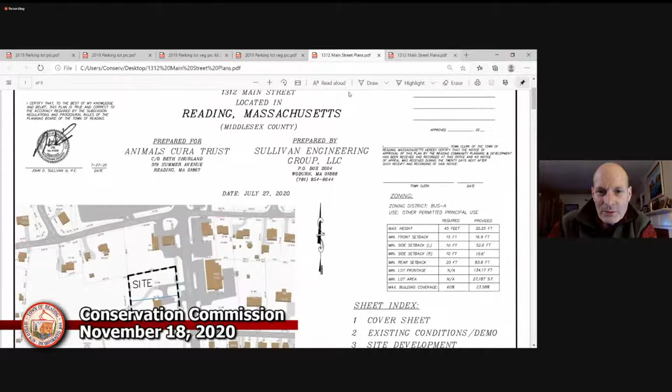So let me just start sharing the screen, and hopefully this will work. So it was - does everyone see that? First off, I'm always unsure if... yep, sure. So it was in this area here, beyond what is the existing gravel parking lot, that we noticed a low depression. So I'm going to switch to some of these other ones. Here's the parking lot. Let's go to this one here. Get to the right one. Yeah. Okay.

All right, so you see the aerial with the 3 areas highlighted? Mike, do you see that? Yes. Okay, so the areas - here's the veterinary hospital right here.

Here is the parking lot from an aerial photo in 2019 that I used. And down here at the bottom, next to the existing house, which is off the property, is a flagged wetland. This becomes important later.

We checked out this area above, right in the center, and a smaller area here. What we saw was in these low areas, dominated by buckthorn with some high bush blueberry, royal fern, and cinnamon fern. The fern was visible along with the buckthorn as it extended towards the parking area and driveway. The ground rises up as it gets closer to the fence and the parking.

We did 3 soil augers in this area here. We did 4 in this area here. And we did 2 over here in the flagged wetland. That's not on our plan and that's not part of our project.

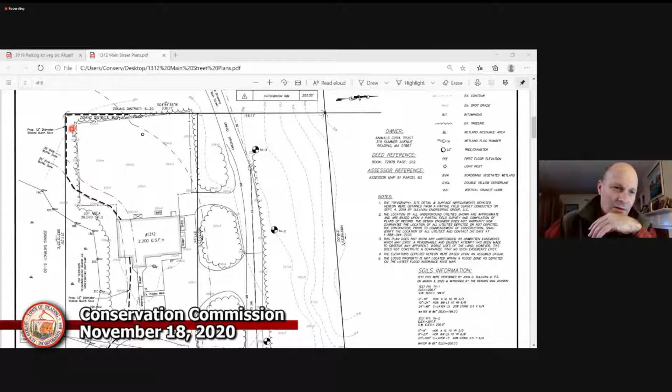What I want to highlight here is this bordering line where the property is, and then the parking area in this area here, and here's the entrance. Assuming this is taken in 2020, I was looking at the aerial photos, and I noticed that this is a 2019 photo, and in this area here, which is approximately 7,000 square feet, there's trees and vegetation. And we weren't told about a parking lot expansion in 2019.

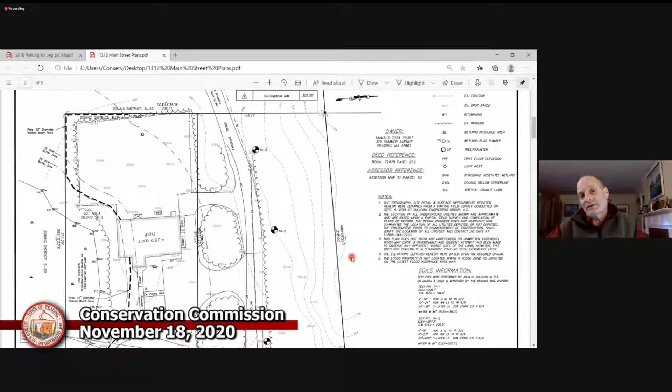And I think that should have come in front of the Conservation Commission. So I'm wondering if there's any information about this area here, which has trees and vegetation in it, and has fewer cars in it than what is out on the site now. That's my question. That's what I found, but I'd like to know if there's any explanation for that.

I think we lost Jack for a second here—he's letting back in. Jack, I think we lost you there, but did you hear Chuck's question? I did get lost and I missed some of that, but okay.

So the question was in regards to the parking area. Looking between the aerials, it looks like the parking area has expanded recently, and I guess there was a question of whether any area was taken to increase the parking area size recently—what's behind the existing building? It looks like the parking area has increased, and how was that, from aerial photographs or something? Yeah, it's comparing the 2019 aerial photographs versus the size of the parking area laid out in the plans.

I wouldn't have that information. Since I did my survey work there two years ago, that's how it existed. Going back two years—if the owners are on, they could try to answer that question. But as far as I've been involved with the project, that's how it's been. There was a fence there, and we haven't expanded it. We've just been parking there, and we put some gravel down, but there's been no tree removal or brush removal of any kind. It's just been that way for a few years, I think.

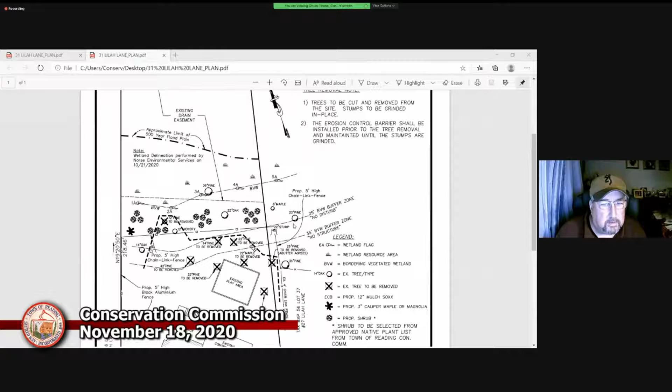The one we're talking about inside the zone there, is that the 12-inch pine to be removed, right? Yeah, kind of right around that notch. Our only thinking there was that where we were putting the fence was pretty close to that, but we can work around that. Yeah, we can leave that one.

That's fine. The only other thing I want to know is what's the heavy dotted line that wends its way through that area? I think that's where we're going to have to put those mulch socks. Jack, you can probably speak to that better since you did this. Yep, that's just the mulch sock to be put in. When the trees go down and they grind the stumps, they're not going to excavate any of the stumps, but we'll put in that mulch sock as protection during that process.

I didn't see anything noted on that, so I didn't see it in the legend either, so I didn't know what that was. But those are the only things I had. It's labeled ECB on the line, and you can see it over in the legend. There are two areas where it says ECB on that line. It's a little hard to see, but in the legend it says ECB equals proposed 12-inch mulch sock. Got it.

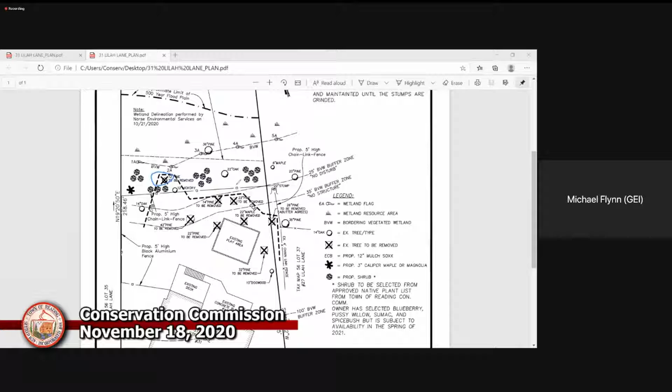You're muted, Chuck. I think I said at the beginning of this, it still doesn't mean there's never hiccups with this remote stuff. Can you call in? Chuck, you're still muted. Okay.

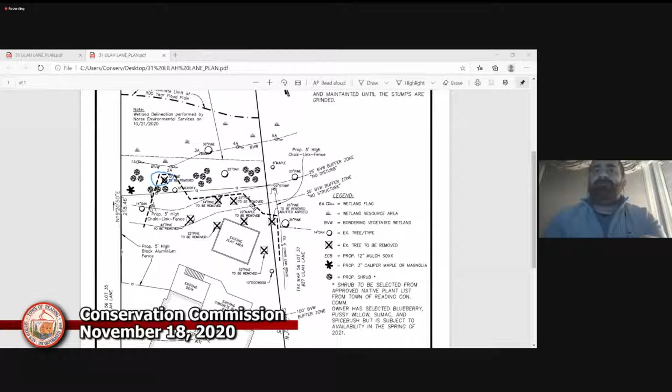Hi, I just had a question. The proposed shrubs to be selected, I think that's what you indicated was the mitigation. Is that correct? Yes. Why are these placed where they're placed? What was the reasoning behind that?

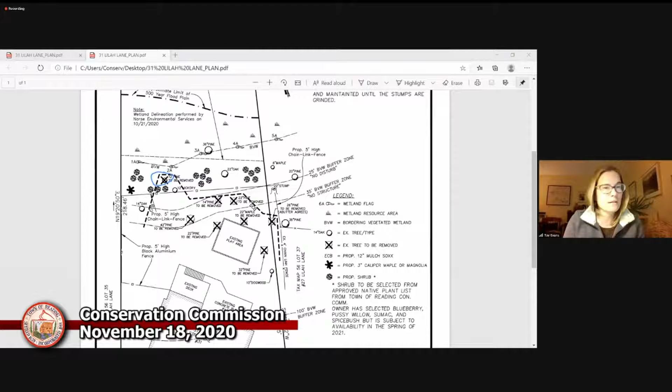So I was under the impression that it was supposed to be somewhat natural in our replacement, but we're certainly willing to accept some guidance on where those go. We're not wedded to those locations. We would like to mitigate the removal of the trees to preserve the wetland and preserve the area in as much as the natural state that we can. So we're open to suggestions there.

I think we might need some advice and guidance from a landscaper or somebody to help us with that once we get there. And so if we wanted to put some of that inside the fenced area, we could certainly do that. We're trying to, our goal was to keep it natural and place it.

I think just to add on to that, the idea was to try to put the plantings within the 25-foot buffer zone so over time these would become natural enhancement plantings in that area, because it's somewhat open now. So by adding all the plantings within the 25, you're going to get a more natural look and you'll get a naturally vegetated 25-foot buffer that doesn't exist right now.

Yeah, I haven't been to the site, but I'm curious just because the impact was further out, and I didn't know if where you placed it needed any enhancement per se.

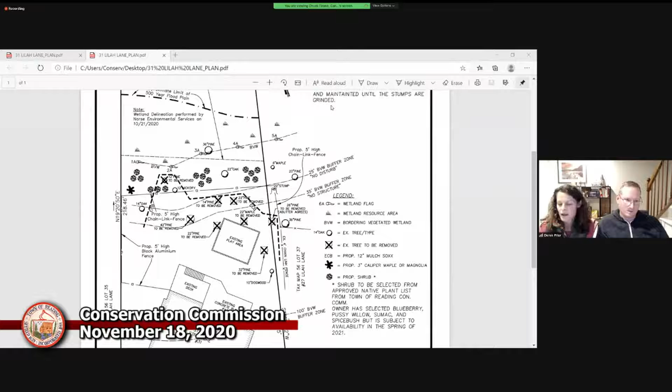Can we ask about the fence as well, if we're going to have to come back, I want to make sure we get that addressed. Our goal was trying to get this installed before the ground is frozen, but we're just trying to do everything the right way. It's just not the process I expected. So can we move forward on any of it?

So the fence you're proposing in the back, inside the 25 foot there, is it proposed to come around on the property line towards the front as well? Yep, it's basically right on the property line as you're looking at it on the screen here on the left, and then connecting to the house. I don't think it's pictured here, but it would do the same. Our neighbors have a fence along the property line on the right side as you're looking at it, and we would connect it on that side as well.

Do you know what the fence on the side coming from the deck area and the sides of the house - on the left side, the fence coming from the deck and over to our property line and back would be a 5 foot aluminum black fence with vertical gaps in it. On the right side, there's an existing chain link fence, so we would basically just go over to that, let that run back to right around the tree that's on the property line there, and then use chain link in the back as well.

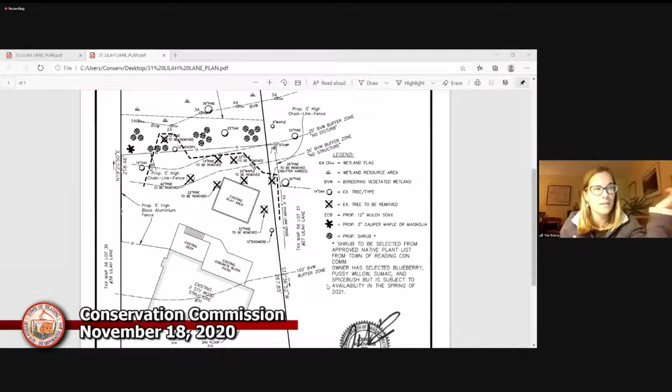I think Main Street is the example we got at 14 Main Street, where what happened was they went through and rated trees on a kind of rating system, saying yeah, this is either a concern because in general these trees are always a concern, or this is not a concern because it's not in a high wind zone, or this is not a concern because of the location - even if it fell, it's likely going to fall away. If you're a homeowner, even if it fell, with this type of proximity any falling may just be a problem.

So I think arborists generally do have the ability to apply some level of assessment on what the safety concerns are here. And I think that's why we want to have that - there have been times where a homeowner has come to us and said, look, this is really close, and the arborist said, well, this particular tree - yeah, all these other ones seem to be at risk, but this particular tree or these two particular trees really aren't at risk, there's no risk of them falling. And I think we want to be consistent with that.

Okay, that makes more sense.

Sure, and I would add that Mike Hannaford, who is our tree warden, has a list. He goes out there and checks for stress cracks and disease and certain things, and he rates it after going through this checklist.

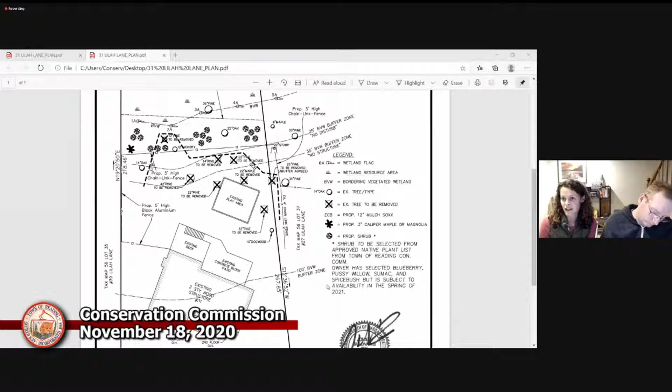I do want to acknowledge that I understood you wanted to see some kind of letter from a tree company or an arborist, and I did try to get that letter. It was hard.

It seems like they're just telling you what they can say. I'm trying to think of this practically, like if I asked somebody to give me an estimate on remodeling my bathroom and they said, I could write something up, but I can just tell you we're going to fix it. What you need to say is, this is not the person or company that's going to give me what I want.

What do you need it to say? What more would you need it to say? If somebody said it was likely to fall, that would be good. So the commission evaluates, we do not guide. I can give you some letters that we thought worked, but your arborist should know what we're talking about and be able to put together a letter. That's their expertise, I just want to be clear.

Hold on, I just want to be clear. If the letter said the tree was likely to fall, that would not be enough? We're not asking, it's not enough. It needs to evaluate if it has symptoms. Okay, well, it's for the arborist to put together.

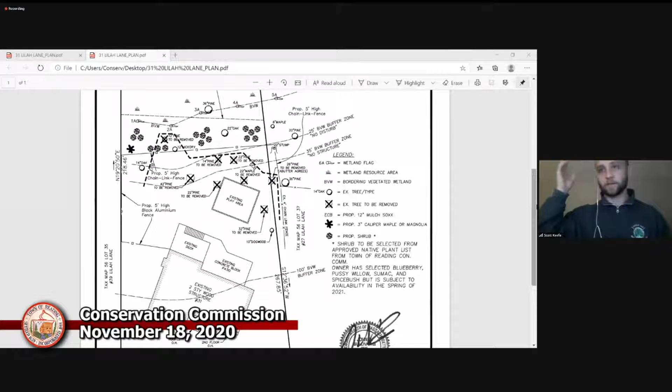Are they planning to put a gate in the fence? I'm just wondering because if there's proposed plantings going beyond it and the fence goes up, is that going to cause issues? That's more... Yeah, we were going to put a small gate back there.

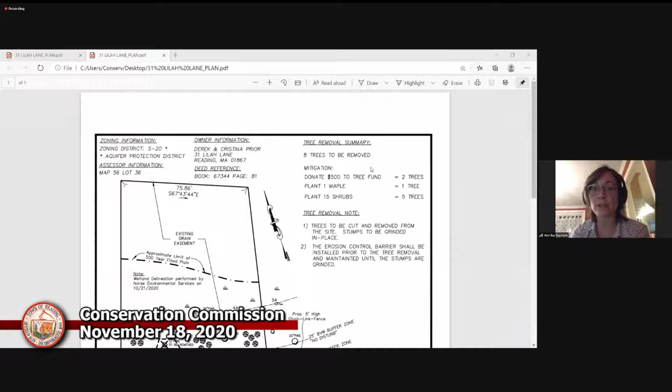Annika, sorry about the background noise, and sorry about coming into this partway through. One of my questions is, has there been any discussion of replanting at this point? Because it seems pretty clearly stated from the applicant that regardless of the health of the trees, they are interested in taking down a good portion of them. So have you guys already discussed replanting?

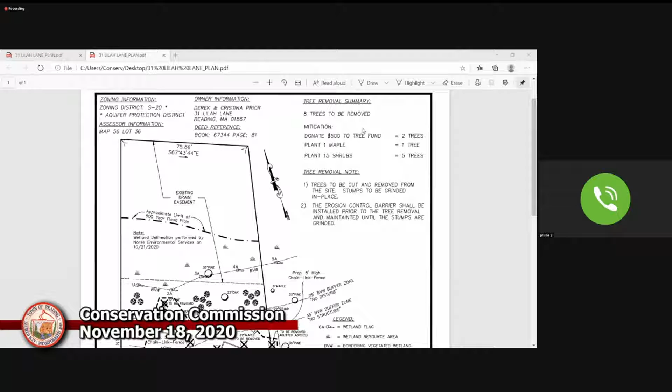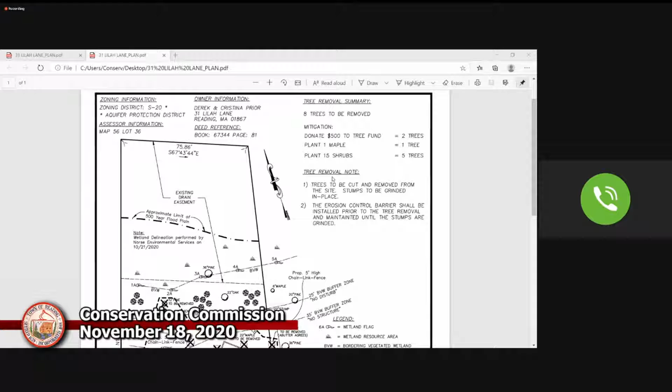Yes, the replant. I've moved the plan down to show what they're going to remove. It says 8 here, I think we've changed that to 7. Is that correct? They'll be donating to the shade tree fund. They'll be planting 1 maple and 15 shrubs, and they're going to pick those from the native planting list.

And then we've gone through the plan already, and one of the points that's not really highlighted is this fence, and the fact that the planting is in back of it is kind of going to create more of an isolated area, and it's going to contribute to the habitat here.

And I thought I saw blueberries - I must have read it in the application. It's down at the bottom. The owner has selected blueberry, pussy willow, sumac, and spicebush. And those berry plants are very helpful in these areas, so it's great to see that.

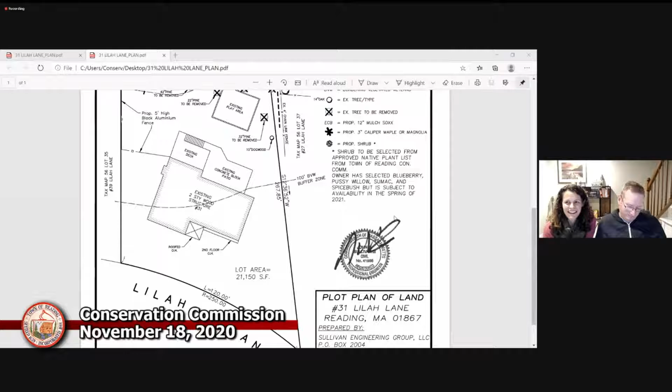I like the sumac, we don't see that much of it. I tried to look for ones that wouldn't be potentially poisonous either to the children or the dog, because it sounds like some are. But I did - yeah, don't get the poison sumac, you're gonna have a lot of trouble.

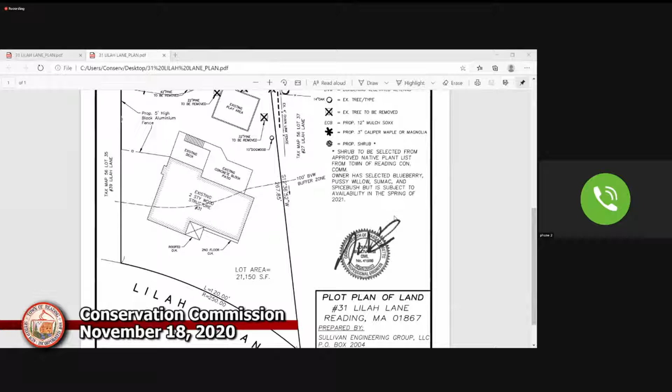Okay, so Mike, was that you're going to ask for a motion for the fence and then a motion to continue? Yeah, I think what we're looking for is a motion for the fence, so that can get that piece of it moving since it appears straightforward, and then we would have the motion to continue. I make a motion to approve the construction of the fence as specified on the plan at 31 Lilah Lane.

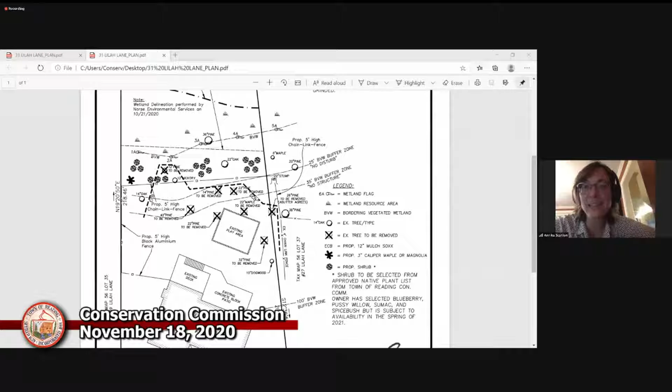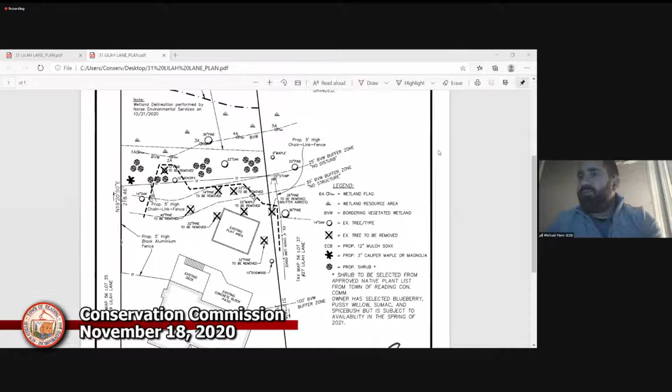A second - Anika seconds. Mike Flynn in favor. David Panett in favor. Scott Keefe in favor. Anika Scanlon in favor. Martha Moore in favor.

All right, and then a second motion to continue. I make a motion to continue the tree removal process at 31 Lilah Lane. Second. Mike Flynn in favor. David Panett in favor. Scott Keefe in favor. John Sullivan in favor.

Anika, we see you nodding in favor. Martha, Martha Moore in favor.

Thank you. All right, Mike, I think we didn't ask if any neighbors wanted to comment. Yeah, I know we continued, but in light of that, I guess we should.

Are there any comments from the public? I'm seeing none. If you do have a comment and feel like you didn't get it in, you can always email the Conservation Division webpage as well.

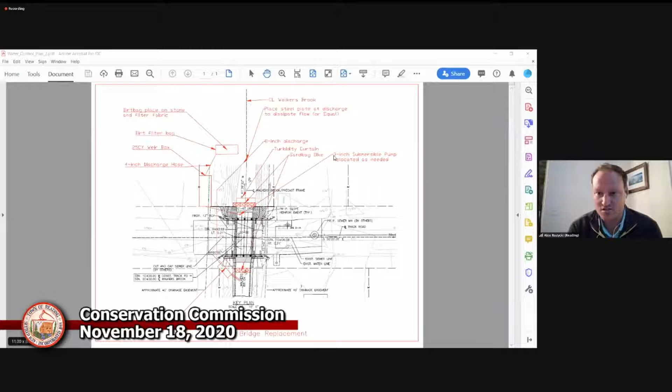I've been to the site pretty much every day, keeping an eye on it since the project started about a month ago. The water levels dropped about 1.5 feet at least since those events, and we're getting into favorable dry conditions, at least for the foreseeable future. But it does sound like we're looking at early December for construction.

The water level today is about 3.5 feet, and we can talk logistics on the pump and the volume of water we're looking at, but I think we're all aware at this point we are looking at a pump. Knowing what I know about Walker's Brook, if we were to try to do this via gravity, which we threw out as a conceptual idea, if the water level backed up 5 feet for a coffer-dam to run this enough via gravity, the people on Cross Street would be calling our office every day. There's about 1 foot of elevation between this bridge and Cross Street, so flooding out this would have repercussions upstream.

I know it's not the optimal method, but I think the weir box is something I haven't seen professionally, and that's something you couldn't do via gravity, because we're able to control the flow between the weir box, the dirt bag, and the turbidity curtain. I think it lends itself to a pretty neat solution and a pretty cool engineering project. So if there's anything else, any specific questions, or I don't know if we're looking at the plans.

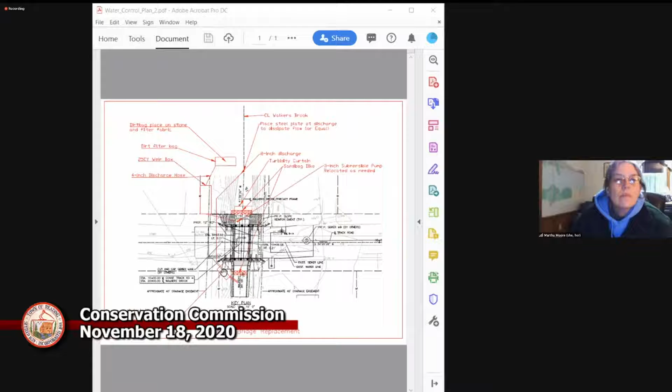I've got the plan in front of me now. If you're looking at the lower part of the screen, that'll be the coffer dam and sandbags essentially holding back the flow. That'll be sent up to the pump, which has to be on a level surface near the edge of the roadway, and we could add some erosion controls around that pump in case of any fuel spillage. That'll run across the road as it exists now, up to the weir box that settles the solids, and then a dirt filter bag downstream of that, and a discharge on that as well.

Sorry, Alex, just so I'm clear, when you're bypassing that, does that go to the weir box?

Only the submersible pump that's taking anything that's getting passed would go to the weir box. The discharge itself, we've already talked to Kenneth Fink about moving the turbidity curtain past the discharge, so we've proposed that change internally. There's a turbidity curtain and the sandbag dike there where your cursor is. I think we're going to ask for that turbidity curtain to be downstream of the discharge, to catch that, or add a second, whatever would be preferred for the commission.

So you are correct, I jumped ahead there and didn't mention the sump pump, but that'll be necessary just to hold anything that's leaking by, and that'll be the dirtier stuff, rather than the discharge that's being bypassed.

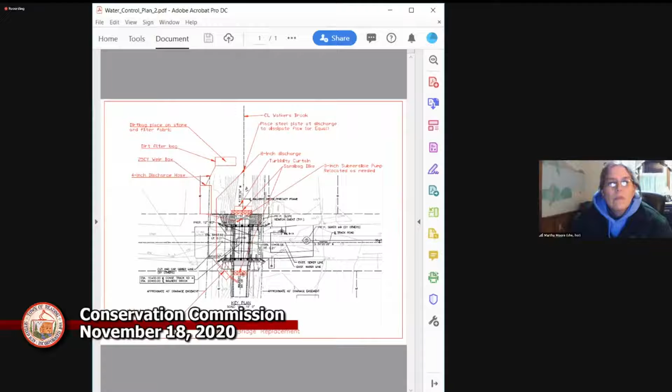I'm in a funny view right now, but I think I see Barry.

Go ahead, Barry. You had something to add?

Yeah, I just wanted to say on the 8-inch discharge that what we like to do is pump the discharge across a plate so that there's no scour when you are bypass pumping. Something you have to worry about is not the solids, but the scour because of the velocity of the pump. So we put a 4x8 plate down underneath that to prevent any type of scour, which is what's most concerning with bypass pumping.

Yeah, so I did see that Barry, I think it says it right here, place steel plate at discharge. Yeah, I missed that. So thanks, Barry.

I do have some questions. Anika, I see you've got a question, so I'll let you go ahead first. Okay, thanks, Mike.

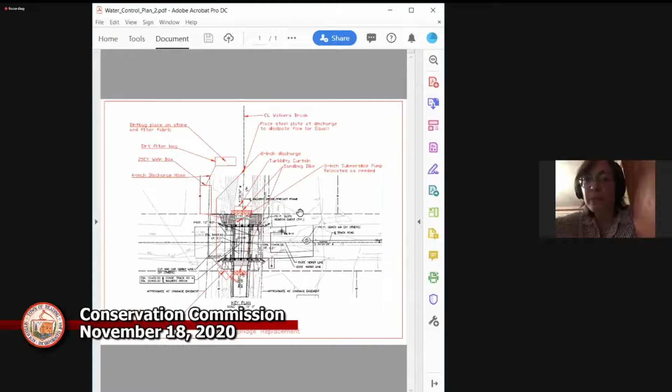I think we got it, Barry. Do you want to take that, or do you want me to start? Yes, I would like to take that.

So, as far as the crushed stone pad underneath the dirt bag, that's going to have to be on a level surface or somewhat gradual slope in order to work appropriately. So we'll have to set the bag up so that it flows down towards the stream, but it's not on such a slope that it's not doing its job. So that's something we'll have to look at when we're out there.

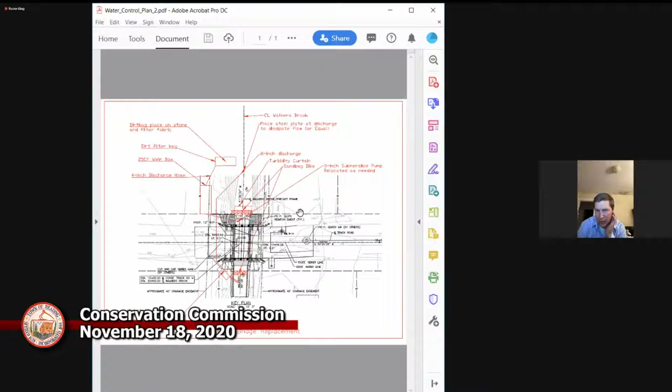And as far as the sandbag cofferdam and tying into the canal walls, we use poly for that and smaller sandbags. So you have a sandbag dam, the heavy bags, and then you'll have poly, and then you'll have smaller bags which toe in the poly and also tie it into the canal walls. I think there might be a detail for it, but it's basically as Barry explained.

I think what we're going to find at the bottom of Walker's Brook is going to be pretty mucky. So the crushed stone is really going to just be needed so we don't lose half the sandbags once they start getting in there, because who knows the last time this was cleaned.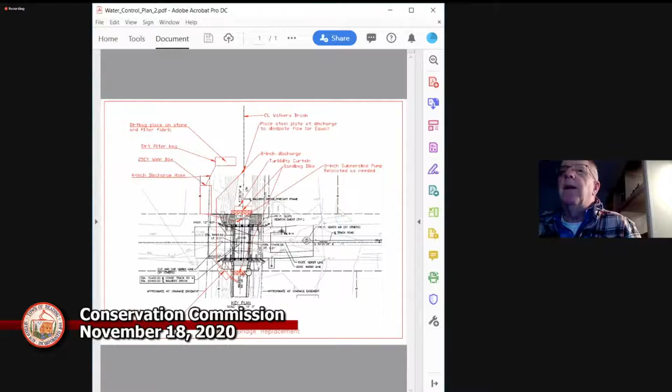So I guess my questions, and I think my questions are kind of similar to when this was in front of us. I still struggle with this - I think the water control plan says the work's not going to commence when a heavy rain event is in the forecast. If a sudden rain event is coming, the site's going to be stabilized and the in-water work will cease until a low flow condition returns.

My question, and I think it was this back then, was: what qualifies as a heavy rain event, and when's the flow low enough to be manageable again? How do you guys know when's the right time to get out of there, what this system can handle?

I think, Alex, what I heard was the intent of this, particularly this upstream one, is you don't want this to back up, because this doesn't back up normally. Creating some sort of pool here will back up the entire system and flood other people out. Yep, which certainly something you don't want to do, which makes sense. I guess the challenge is that the pump system you seem to have is - the 10-inch pump, I know has a decent capacity, but does it?

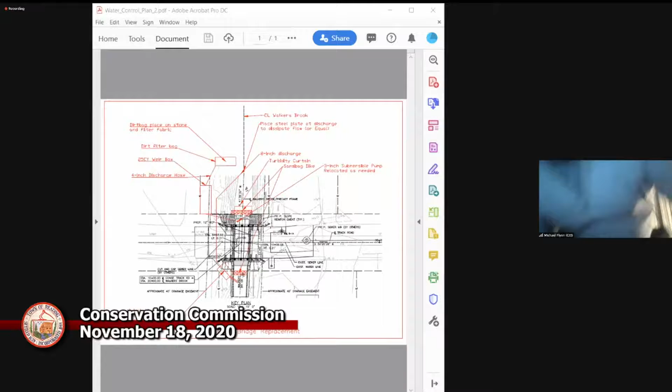I can try to quantify that. I think I had this question earlier, and Barry can back me up if my numbers are correct. So I went out today, and Ryan and I took the depth of the water and the velocity of a stick going by the bridge, and we calculated a flow rate of about 3.5 cubic feet per second currently. Barry's pumps are rated to about 12.

So we'll know pretty quickly. I can't tell you the exact rainstorm offhand of when we're going to have 12 cubic feet per second, but if the water depth is about 3.5 feet right now, we've got a couple feet of head before we get ourselves into any sort of problem.

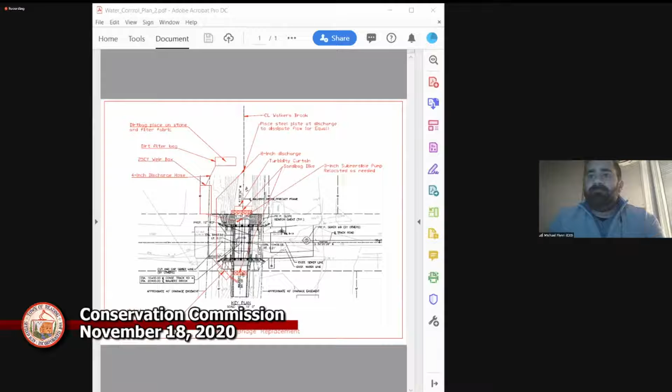And as I understand, the work's only scheduled for 5 days. We're not doing this at a time where a severe thunderstorm is going to drop 1.5 inches of rain. It's a time of year where we could have a pretty good 5-day or 7-day forecast. We don't have the exact rainstorm figure, but the pumps are rated for 12 cubic feet per second. If you have the tech spec attachment, there's only about 2% of the time Walker's Brook is operating at that flow rate. So for 98% of the conditions on Walker's Brook, his one pump is sufficient.

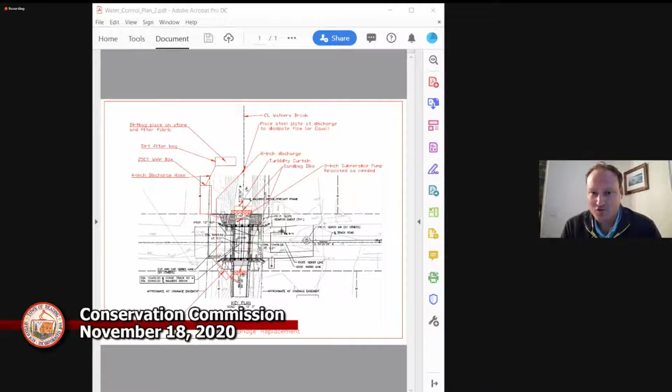It'll take a bit for us to be worried, but if the plug has to be pulled, the plug has to be pulled. Those sandbags could be out in a second.

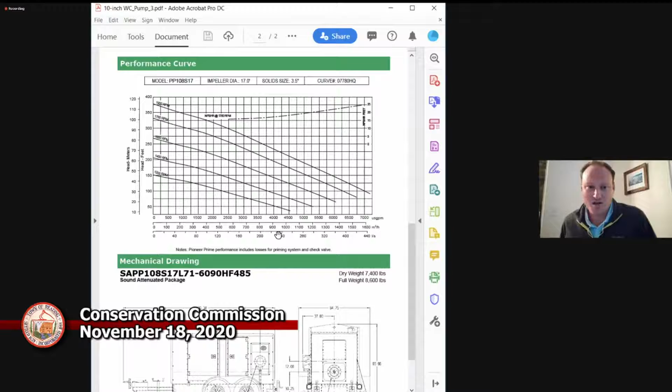I think it's a tech spec from the highway division that AECOM wrote, not the pump performance curve. Not that anyone's interested in those.

So I've got to find my charger. Let's think here.

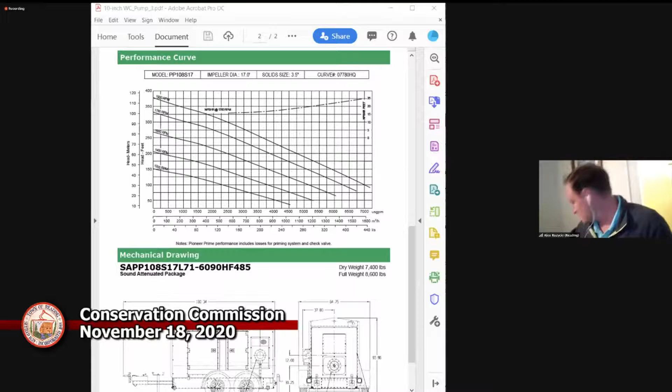So we're really trying to cut down on the duration of the project and try to limit our exposure.

These culverts are rapid construction, and where it's a clamshell culvert, we're only going to be putting in the bottom pieces, or the bottom half, if you will. So once we have the bottom half in, we're no longer going to have to be bypass pumping.

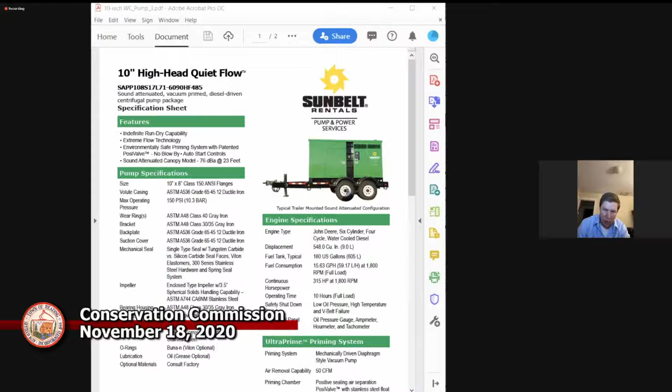With that short duration, we should be able to identify what the weather is going to be like for the week. That should really allow us to not get into a situation where the pump is overwhelmed, because we're not going to be dealing with, say, a summer downpour or something like that.

And I think that makes sense. I had that same thought and comment last time - ultimately you're not in there for very long, which is good. And you're in there for a duration where you can have an outlook of the forecast and say, well, we're not going to mobilize because, a week out or 3 days out, we see 2 inches of rain on the schedule.

What I'm hoping is formalized in this plan so that it's clear to everyone is, what is that rain event where we say, is it 5 inches? Is it 2 inches? Is it 1 inch? Because I do think that's important to understand before you block this off and try to bypass.

The other piece of my concern - and Alex, looks like you were looking at the pumps a little bit and you've got the flows - but the 10-inch pump, my impression is it has high volume capacity. It's probably going to draw down that zone really quickly. I guess, is that too much? To me, I saw that 10-inch pump and said, well, they're planning on a larger storm. They're planning on rain to come, and they're protecting from that event.